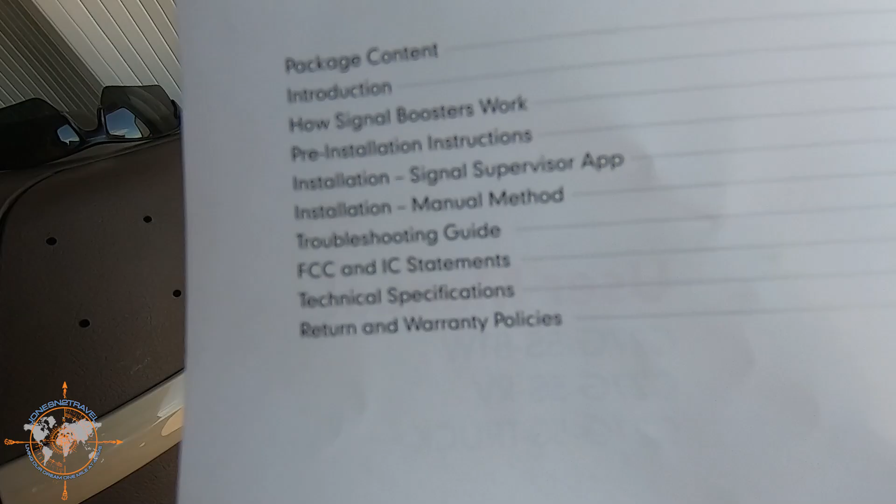All right, here's the table of contents. It goes through how the booster works, pre-install instructions, installation, troubleshooting, all the FCC and technical specs, and the warranty. How signal boosters work: basically, the system amplifies the signal from the nearest tower and then retransmits the amplified signal to any type of cellular device in the vehicle. It'll boost 3G and 4G LTE signal from all US and Canadian carrier networks.

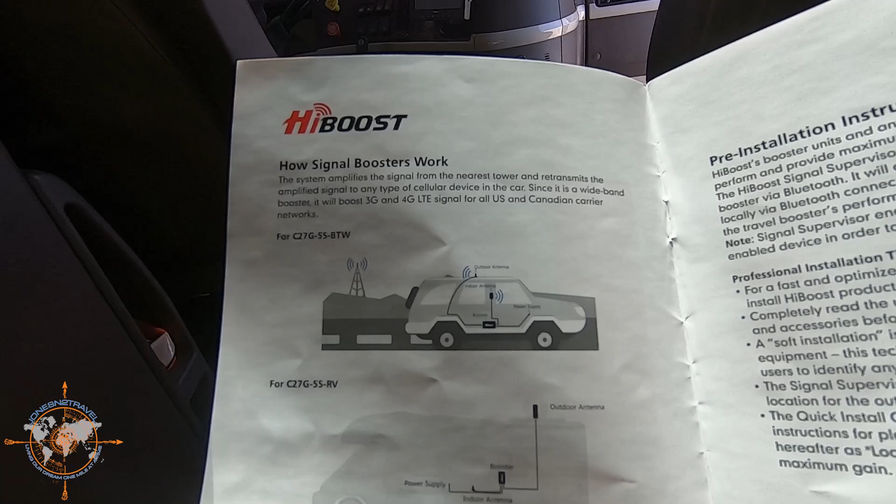Here's an example of one installed in an SUV, here's one in a motorhome, and here's one in a truck. This is the one we're installing today.

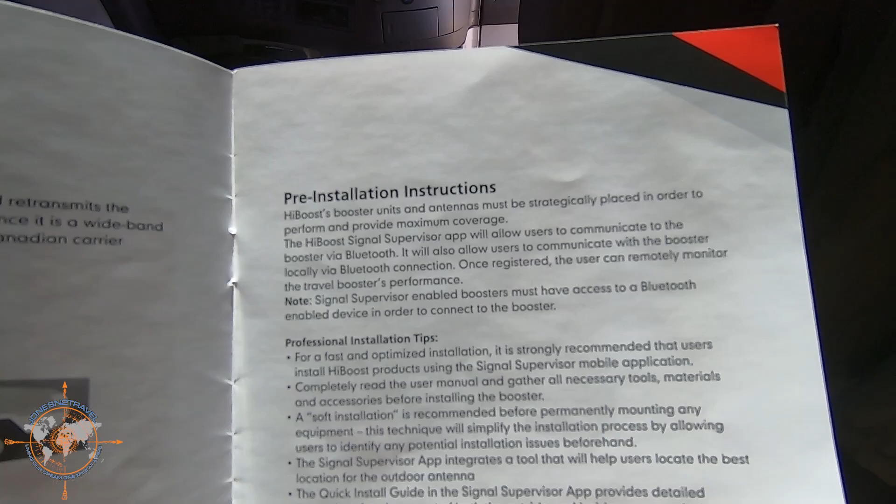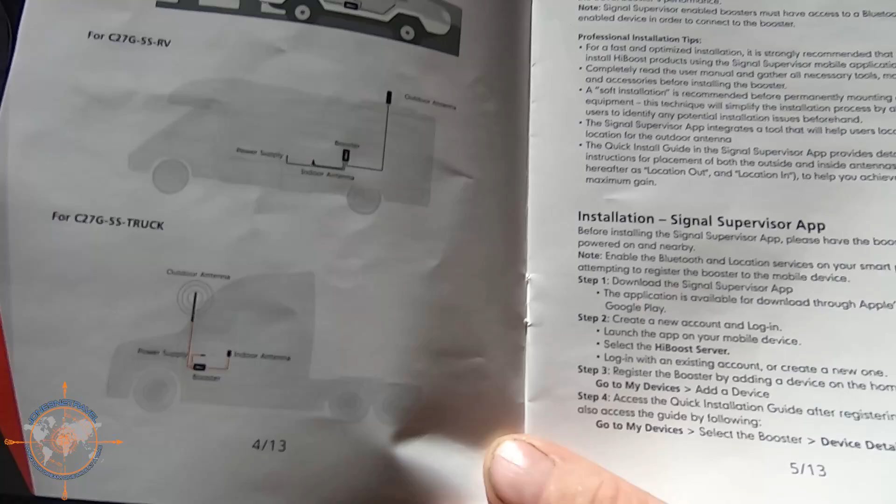Pre-installation instructions basically tell you that you have to strategically place your antennas. If the outdoor and indoor antenna are too close to one another, you could get feedback, which could be detrimental to the boost. Make sure you read through these and get a good understanding. The picture really is worth a thousand words because it shows you how it's got to be set up, and they have some really good instructions on how it has to go together.

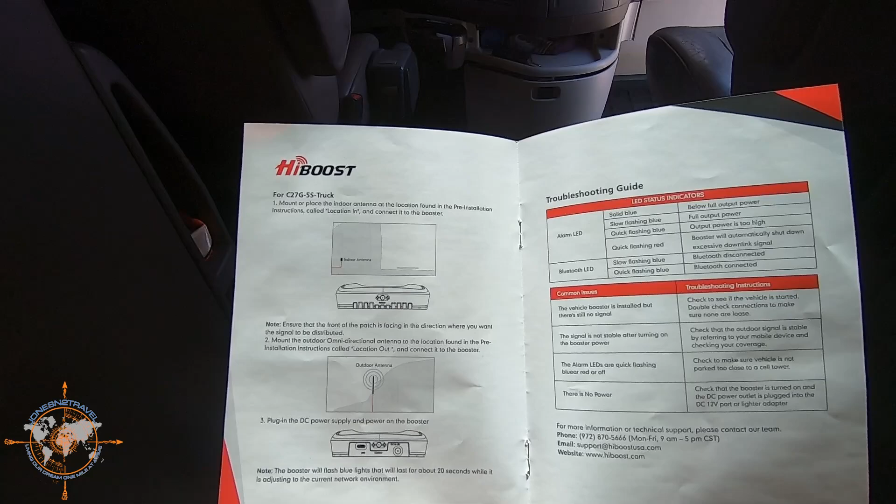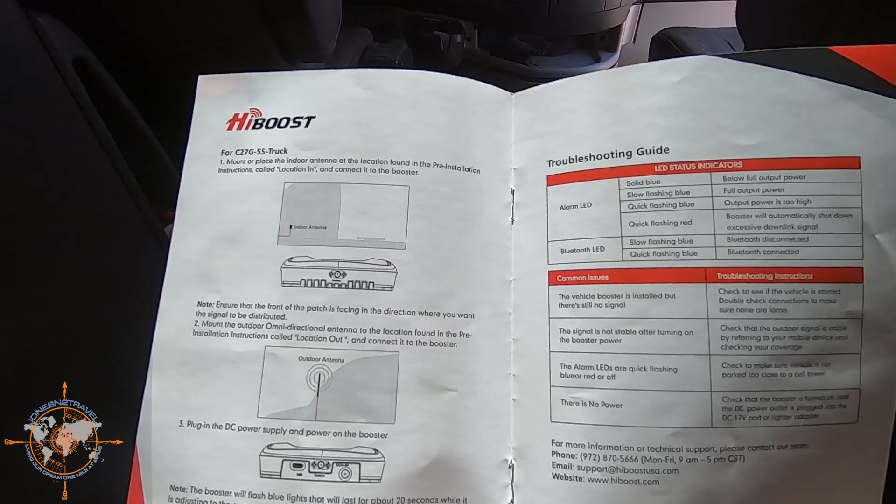This installation is somewhat straightforward. This book covers all three products we saw in the front of the booklet. Page 8 is specifically the truck version we're installing today. Basically, once you locate the outdoor and indoor antennas, you route the wiring in, hook it to the booster, plug it into power, and away you go. They also include this nice little troubleshooting guide.

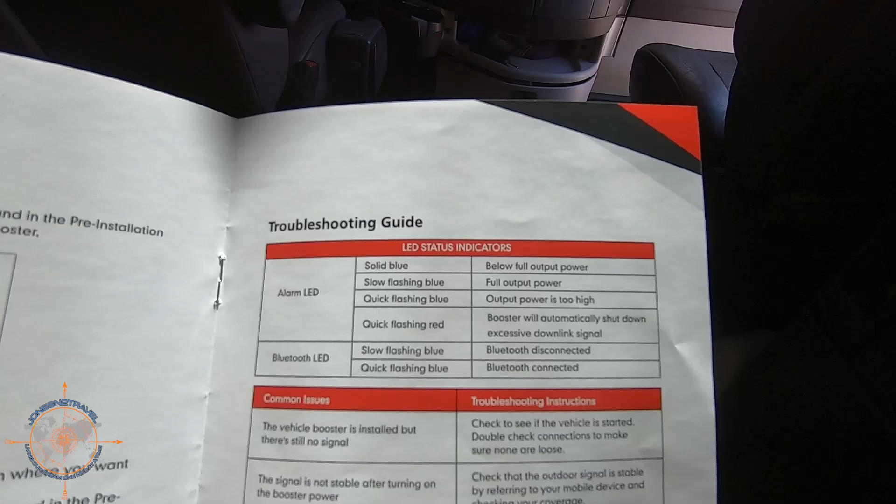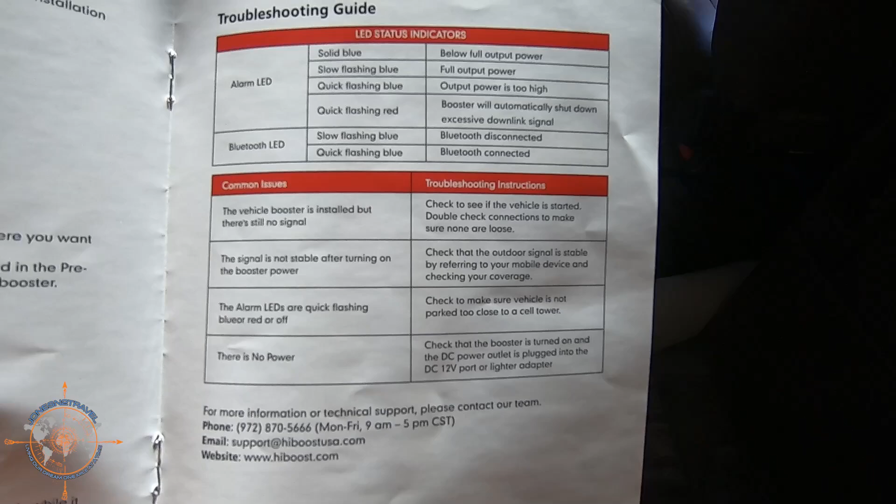If we have any issues, we can refer to this and see if it helps. In my opinion, a lot of these troubleshooting guides are almost a waste of paper, because every time I have a problem, the guide doesn't mention it or their recommended solution doesn't work. But I'm not saying that's Hiboost—I haven't installed one of these before, so we're doing it together. I'm glad to see they have a troubleshooting guide; it's a pretty straightforward manual, fairly basic. For some products I've tried, the manuals are just a little folded piece of paper, so it's good to see there's an actual booklet.

Yeah, good information. My nice new Leatherman—I got it from my son-in-law for Christmas, so awesome.

All right, let's get this open. I'm curious to see how long these cords are—see how far we can go. So this is the interior antenna, and it looks like it's fairly long. I'm trying to decide if I want to put this on Tina's side of the truck or on my driver's side. This is about a 12-foot cord, so that's pretty decent.

Let's check the coax for the antenna, because that's going to be the critical part. If I can get it open... Now, this package says it's 9.18 feet, or 2.8 meters, so we'll see how well that's going to work. Nine feet doesn't give us a whole lot to play with, so we've got to get this antenna mounted to where that 9-foot coax will reach the booster. Let me do some investigating, figure out how I want to do this, and we'll go from there.

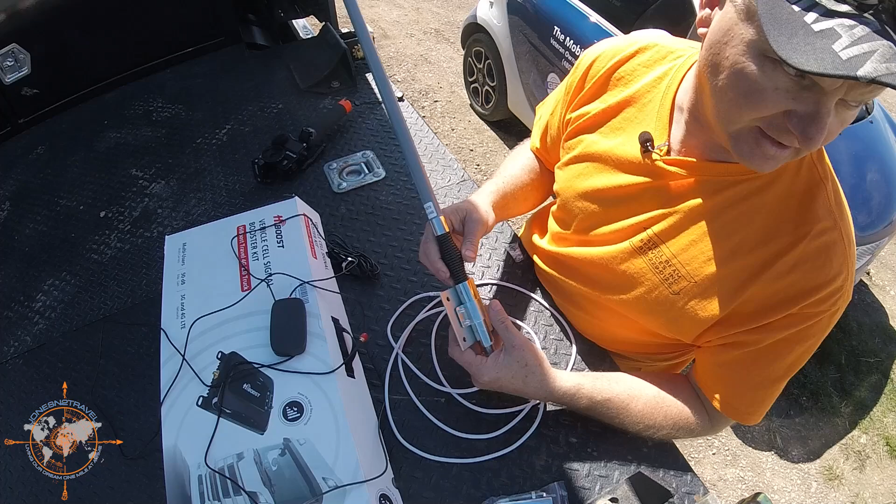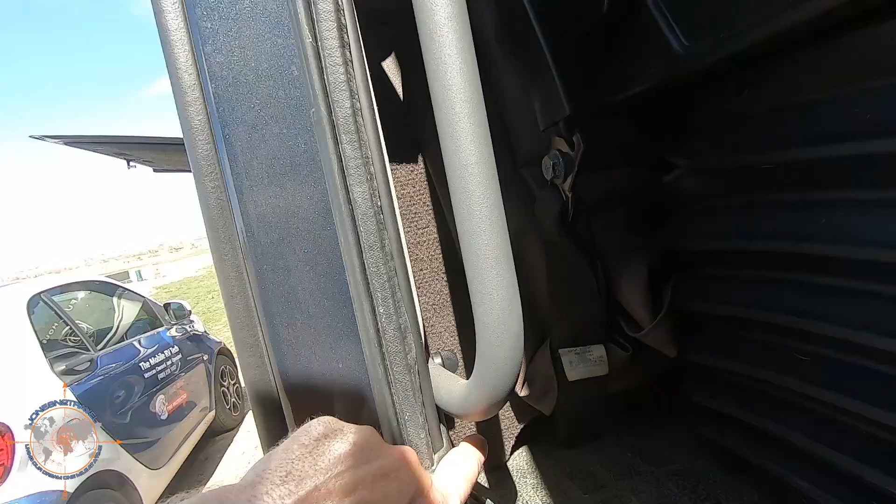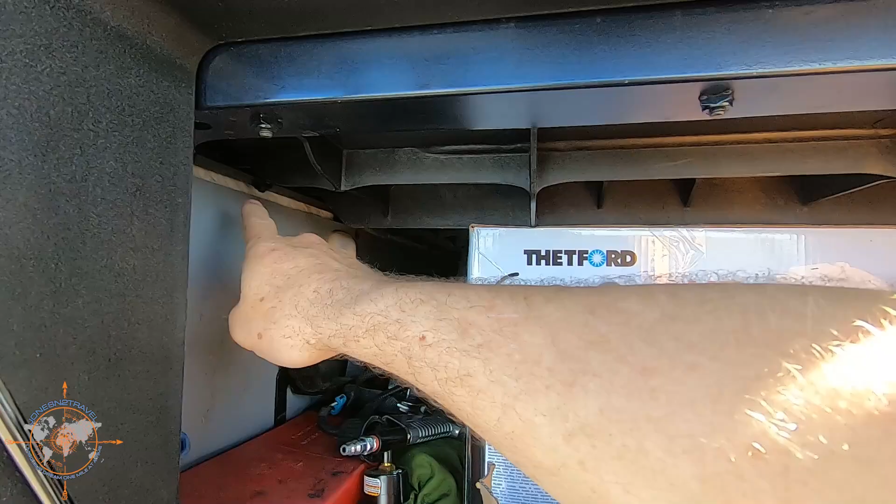My basic objective here is to mount that antenna over here somewhere, maybe on the outside of the door, and then I've got access here to the back. I can run the coax, and then, depending on how long that cord is, either put the booster back in here—I know it's dark in there—run power to it, and then run the interior antenna line along here and up into the cab, putting it on the back wall by the bed or by the table. That's probably my best option.

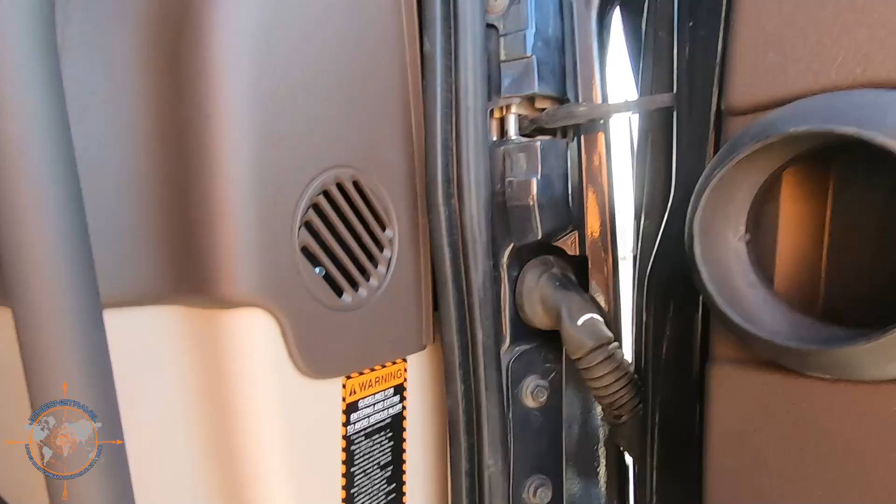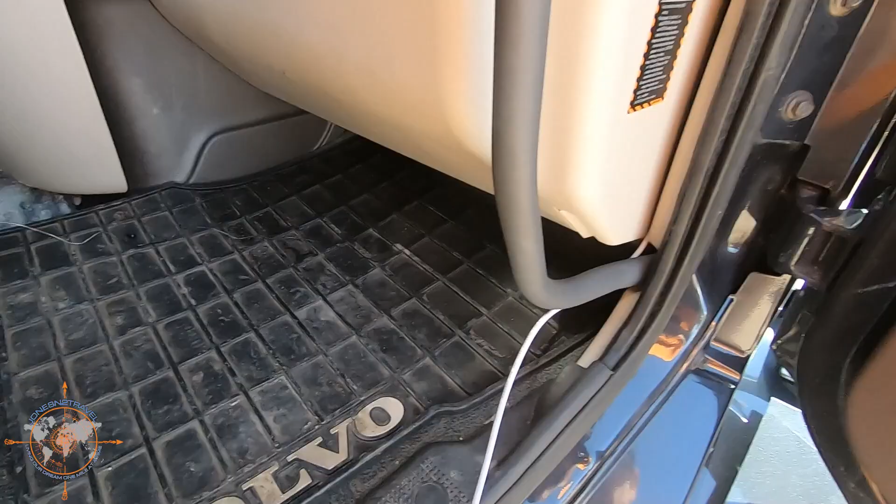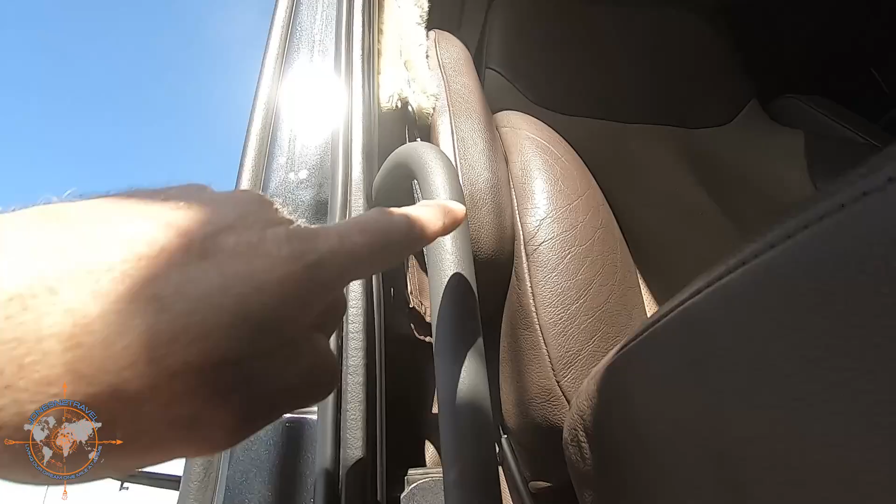Quick update: so I mounted it up on the mirror right there, ran the coax over temporarily, just looping it through here. We're gonna go out and drive this thing and test it, but came down into the cab and out here, and I'm gonna mount the booster up under here somewhere. Every installation is gonna be different. It's not quite long enough unless I mount the booster on the floor right there—that might be a good idea. Just run this coax underneath here and stick the booster right here, and put the interior antenna up there somewhere behind Tina's head or something.

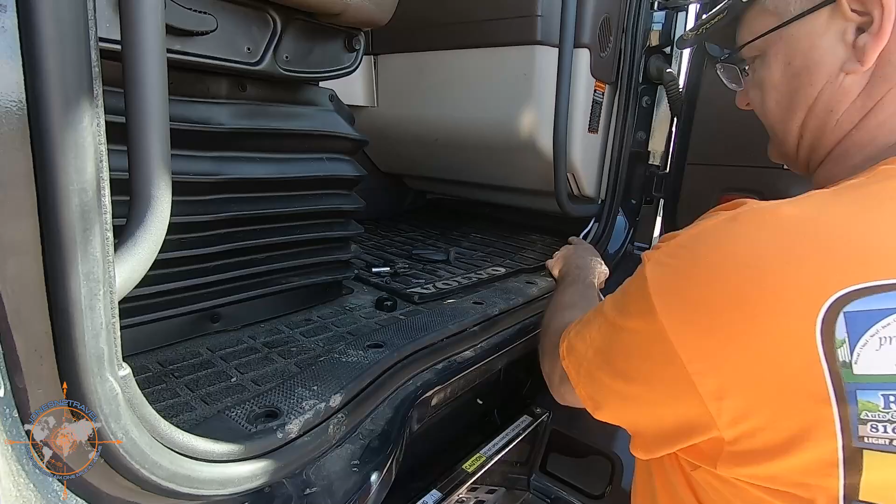So I decided to pull this off, and we're gonna run this coax under and put our booster over here, kind of out of the way. I don't want it to be in Tina's way when she's riding, so.

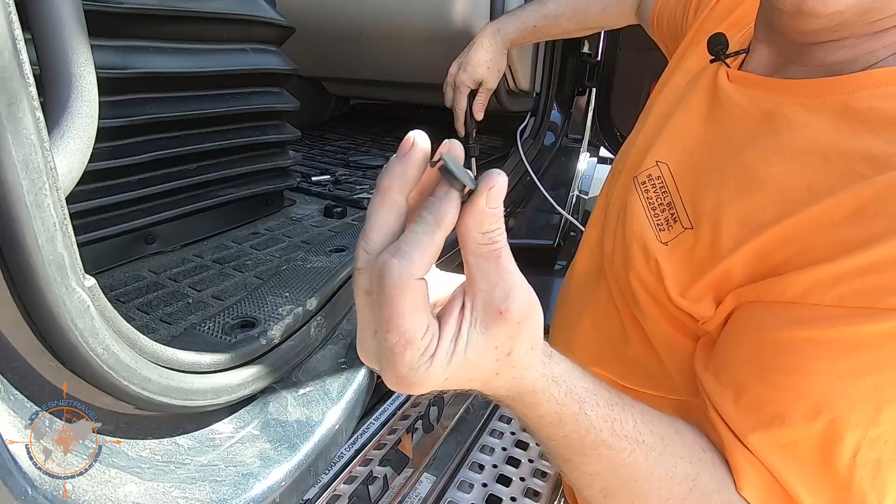This is pretty easy to take apart. These little caps just pop out, they're just covers. Then it's got a little star screw, and that's all there is to it. Once you get these all out, you should be able to pop this thing up, kind of like that.

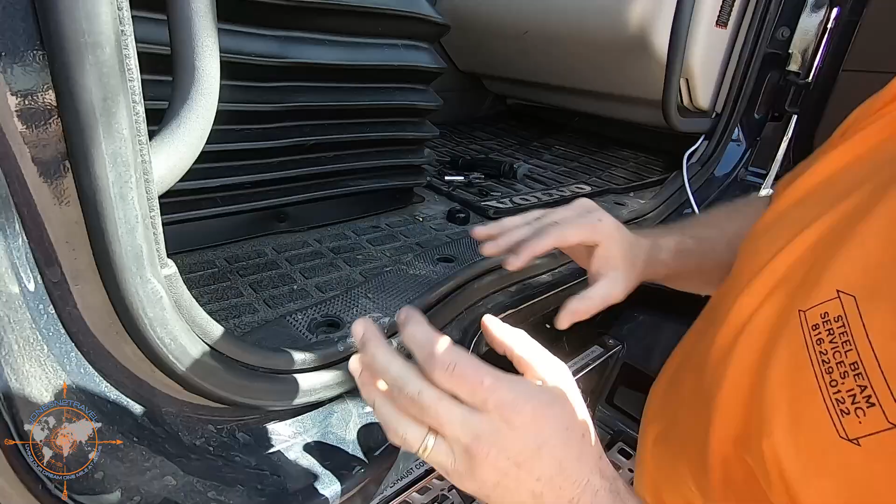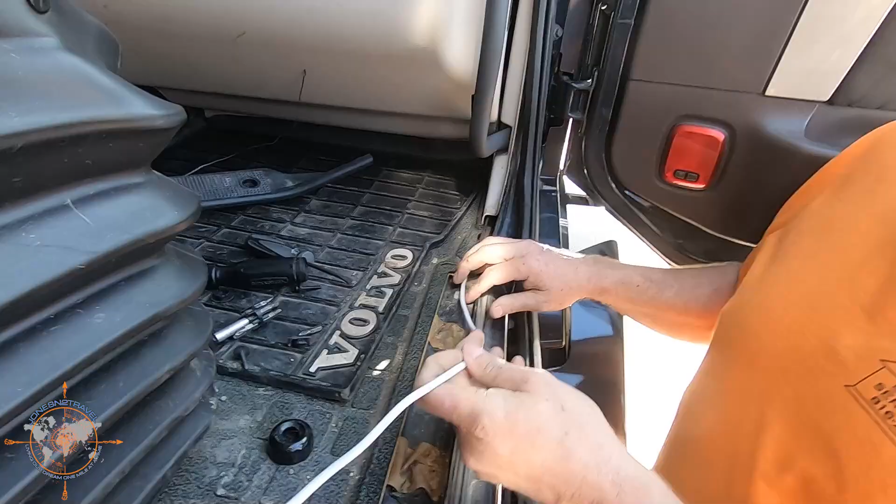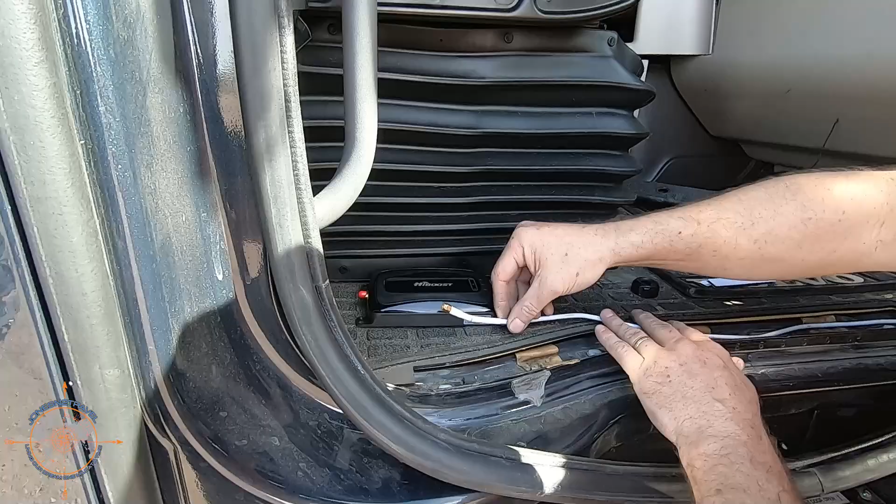I'm thinking we're gonna go just like that. Outdoor, so it's gonna go like this. See, it'd be sweet if I could put it back here, but maybe something like that. It's nice and out of the way.

Yeah, let's try it. If we don't get a signal through it, we'll know it's because I squished it. So I mentioned earlier that there's an app for this thing.

Just get it in the Play Store, and then I guess we have to create an account, and then we'll turn the booster on and we'll see what happens. Okay, so I signed up. It's pretty straightforward, it walks you through, you put your name, phone number, that kind of thing in. Let's see if we can add a device.

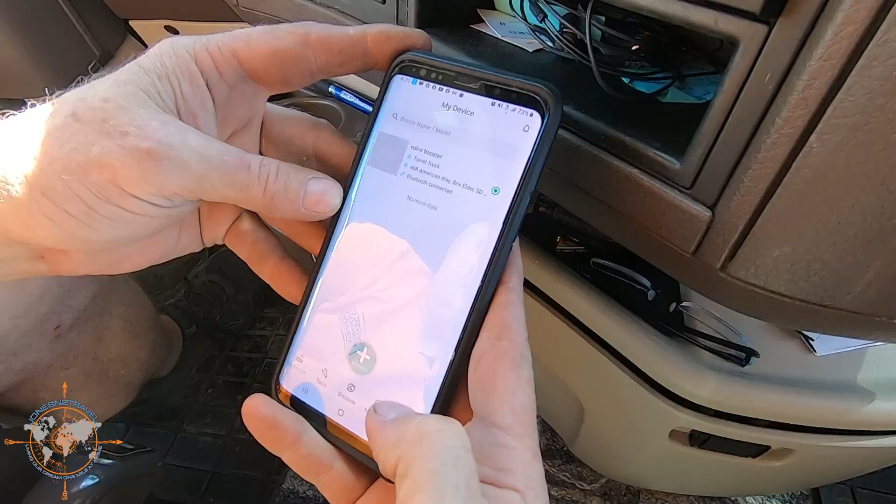Scan for Bluetooth. There we go, well that was easy. My device, there we go. All right, this is pretty cool.

So you can see here when you go to your device, this shows you the RF performance, and it's kind of in the middle range. Oh, that one just jumped up too. We'll go find a place with some crappy signal.

Select my device because we added it before we left the RV park, and you can see the green dot means that it's on. And we jumped from 2 bars of nothing to 3 bars of 4G LTE. Yeah, we're literally in the middle of nowhere, or pretty close to nowhere. This is without the booster.

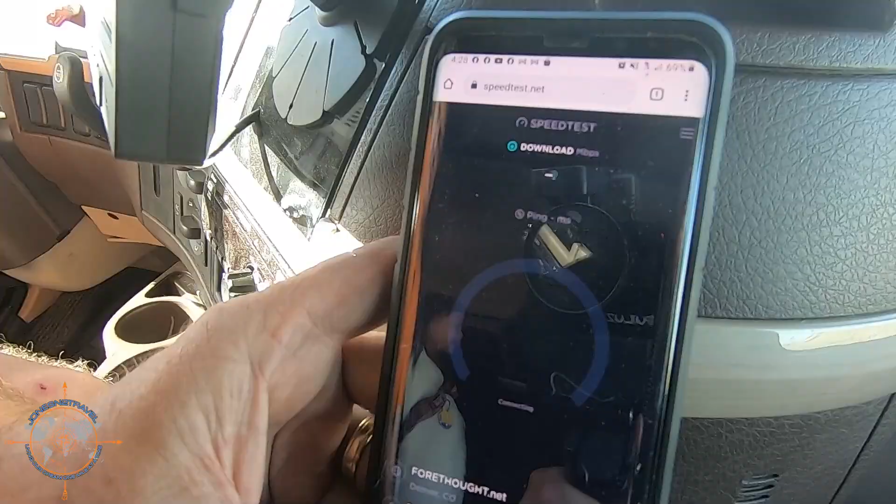Won't connect. Yeah. Okay, let's try this. 57 milliseconds, that's good.

Oh my goodness, that's impressive. Tina's gonna love this.

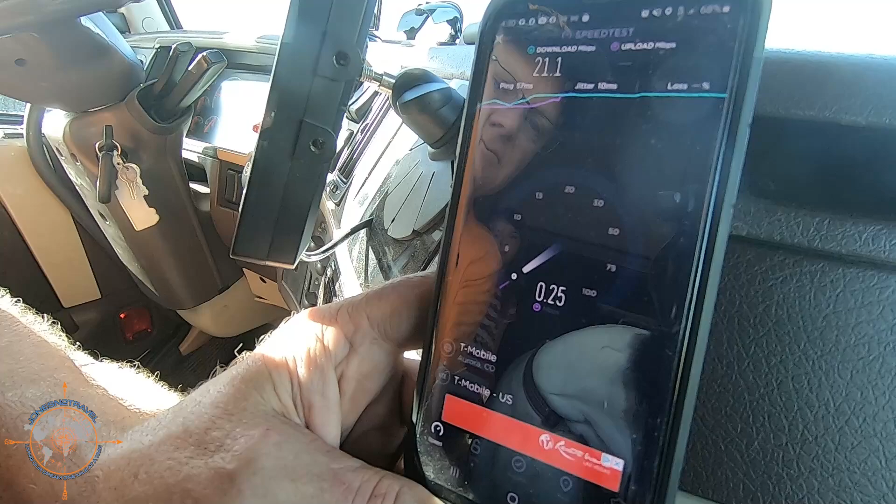Now upload here without the booster was non-existent too, so I'm not surprised that it's lower than download. It usually is. The upload is still not the greatest, but if you were boondocking or out somewhere with no signal and you had this booster, you could at least get help, right? You could at least call somebody or get on a website or something, even if you couldn't download or upload anything. For emergency purposes, that doesn't really matter.

So impressive. So this is my hotspot that I have in my RV that we take everywhere with us, and it's AT&T. So we're gonna run a speed test with the booster on.

Yeah, our AT&T here's been a little slow too. T-Mobile works really good, Verizon's working really good, but AT&T's been a little iffy. But at least you've got upload, right? Yeah.

And then we'll unplug it. There we go. And run it again.

I know that there's a way as well on these hotspots to go in there and change the channel, the bandwidth. Oh, channel, yeah. And this will boost the channels differently, I would imagine. Correct. Feel the difference. Oh, yeah.

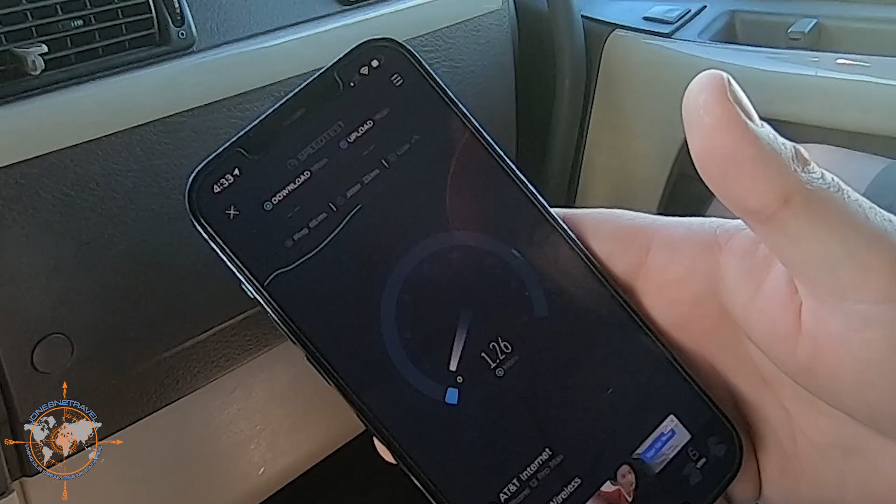Still enough to get help, but probably not the best connection. I don't think the kids are going to be happy with that connection. No, there won't be any tablets going on that, or video games or anything. I couldn't even watch YouTube with that signal. I couldn't even watch my own videos, and that's a shame.

I think that's worth it. I think that's worth the cost of the booster, and it didn't take us that long to install it once we figured out where we were going with the wires, and I still have some cleanup to do. I'm gonna clean up that wire outside just so it's not flapping around in the wind, but so far so good. All right, you guys ready to go back to camp?

Yeah. Okay, you ready, Maggie?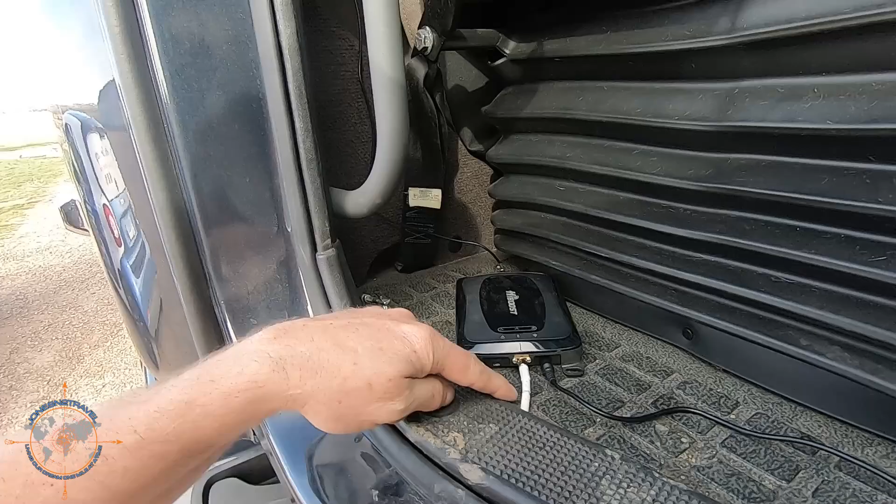All right, so here's what we ended up with. This is kind of sitting on the floor for now, it's probably not gonna move. Coax goes up through the door and up to the antenna, and I'm gonna Velcro that to the mirror case just to keep it up from flopping around. Temporarily have power coming out of that USB plug.

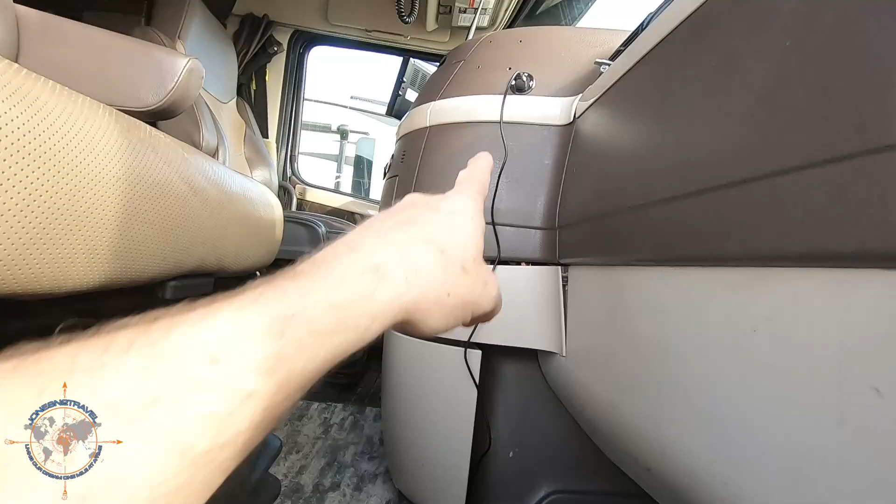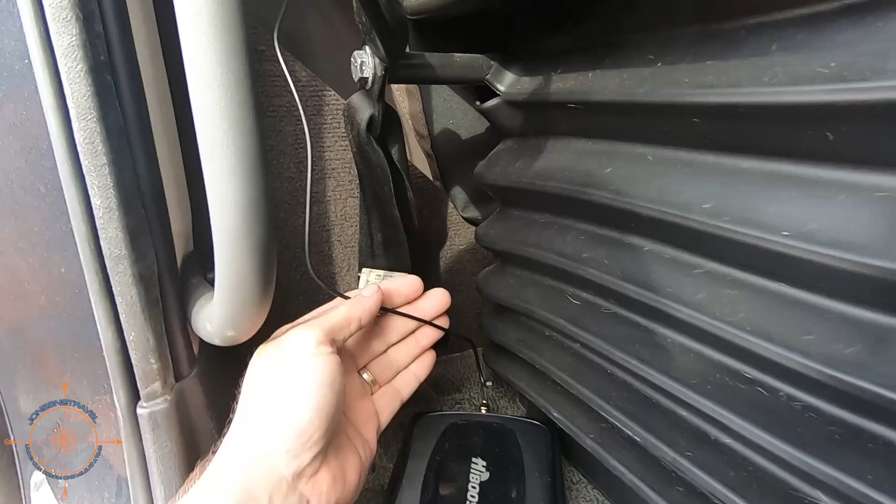Down and over to the booster. I'll rewire that so I have direct power to it. You can see the lights are on it, it's still on. And then this is the indoor antenna. Let me climb up here and show you what we did while we were experimenting with it.

For me, this booster provides mostly pros and very little cons, more like nice-to-haves really. So let's get into the pros. First of all, it's compact. Compared to its competitors that I've seen, this unit is really compact, but it seems to pack a real punch in performance. It's nice that it's small, and it's easy to place pretty much anywhere.

Ease of install. It really was easy to install, simple and straightforward. I'd say Hiboost has done a really good job packaging this unit with everything you need for the install. Signal Supervisor app.

The Signal Supervisor app was easy to download and recognized our booster almost instantly via Bluetooth. Plus, it's just cool. I'm excited to really take some time to dig into the app and geek out on all the data the app provides.

Well packaged. I was impressed with the quality of the packaging, and it really does look nice when you open up the box. And it's competitively priced.